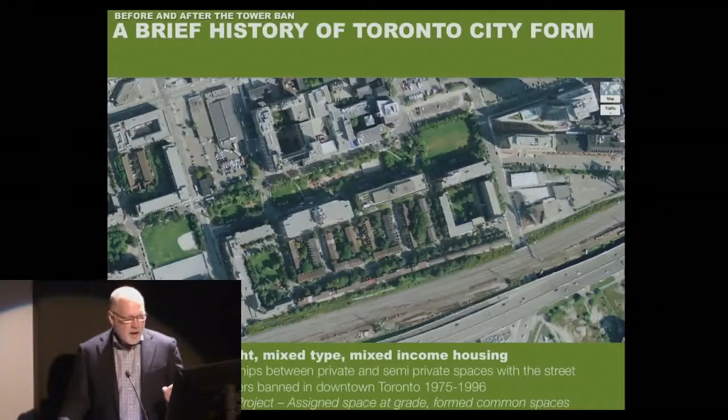A number of buildings were constructed during that time. Some of them are very successful and continue to be successful today.

When the ban was lifted in 1996, it happened by chance to coincide with a significant change in the economy. The economy in 1991 was in severe recession, but by 1996 we were emerging out of it. The ban was lifted by our mayor, Barbara Hall, and the building type being studied at the time, in other places but very specifically in Vancouver, was this tower and podium type that managed urban space, wind, and density.

So our period of growth, this next hyper-growth period from 1996 to where we are today, coincided with the development of this building type. I want you to look at this chart because it shows you some accuracy and some inaccuracy.

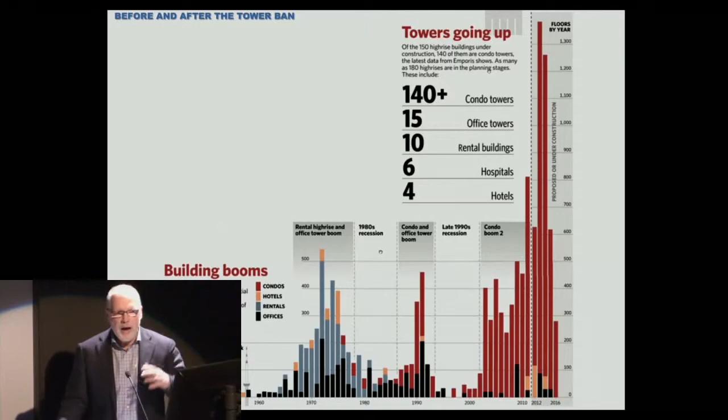So how can growth, with all of the naysayers you read, all of the concern about this building type, how can growth be not slowing? There are lots of explanations in the paper, which I'll leave you to read. But I also want to give you a glimpse of what that means on the ground.

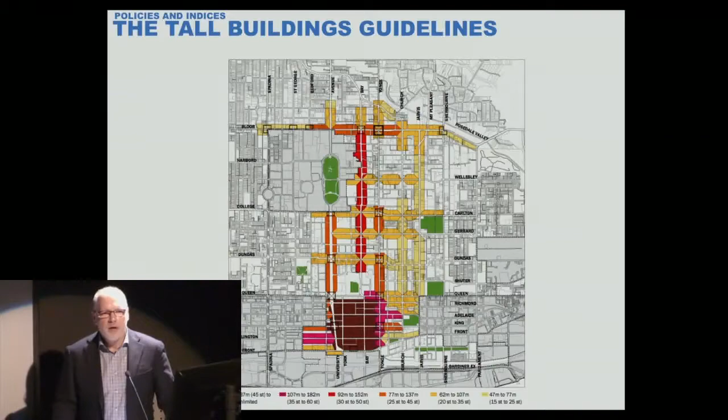So as you can imagine, having policies that might manage this growth, recognizing our history, looking forward to a vibrant new creative city, there are two important documents I'm sure you're aware of. I not too jokingly ask all of the people in my office to have a copy at the office, a copy in their favorite reading space at home, and maybe under their pillow.

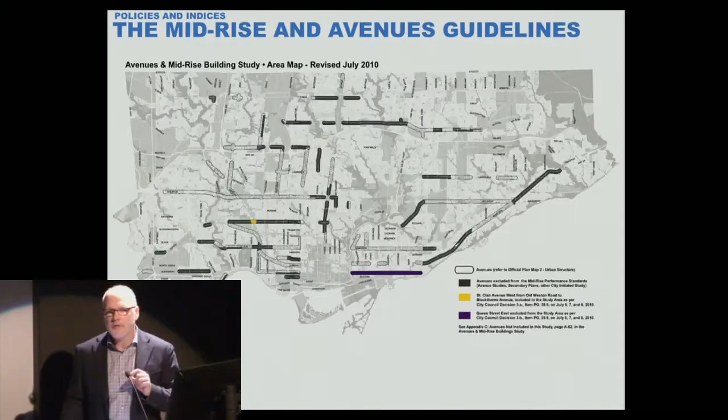What's being suggested is that culture, creativity, and innovation are a powerful economic force. Now, we would have said manufacturing was a powerful economic force, or well, we would have said that for a good long time, wouldn't we? Manufacturing is a powerful economic force, finance is a secondary economic force.

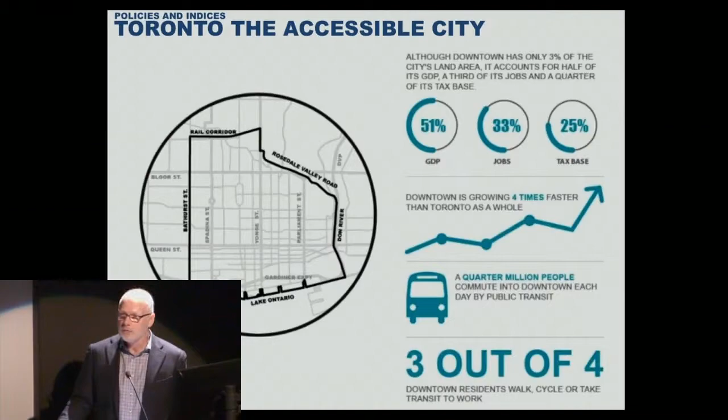So suddenly, it would seem to me that the reason for the unstoppability of hypergrowth in downtown is not based on novelty, it's not based on spectacle, it's actually based on an incredibly powerful foundation of healthy city growth.

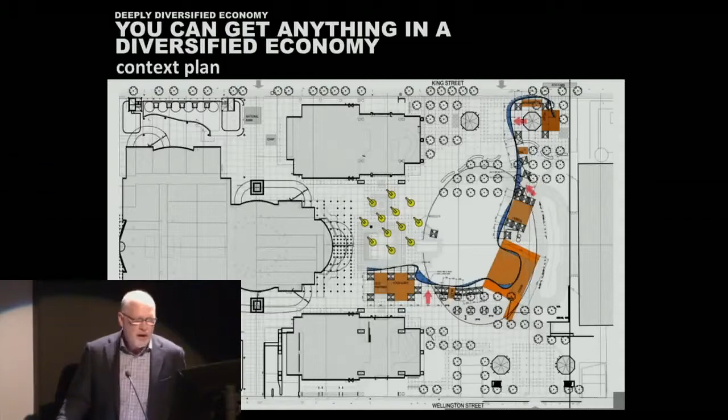1,500 feet of ribbon, of spandex, 20 feet high, the same amount of rental scaffolding, step motors, windsocks — and it was all able to be done through gifts in kind, a little bit of philanthropy, and a little bit of research. Suddenly we were able to reshape an urban space — actually a very bad urban space in downtown Toronto — and give a glimpse of what can happen with a little bit of imagination, in a temporary way, in David Pecaut Square in downtown Toronto.

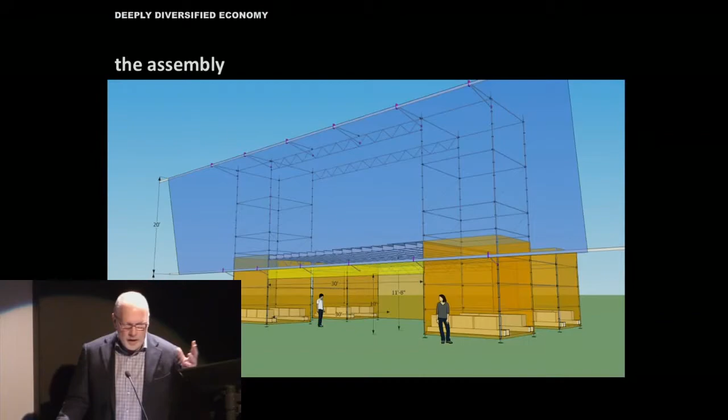Marcin and Bradley from my office led this project. We were able to do some diagrams to put it all together.

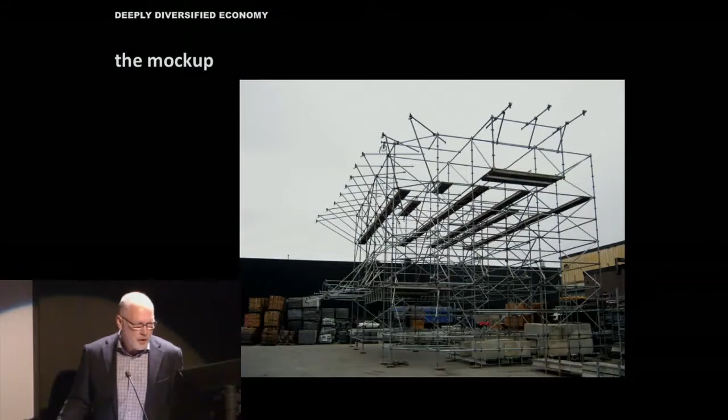We went up to a warehouse site just a little bit north of Toronto, had a mock-up done, and had it tested to failure. We stretched the spandex over these frames, soaked them, and then had a giant fan blown at them. Like, where do you find a fan big enough to tear the wet spandex?

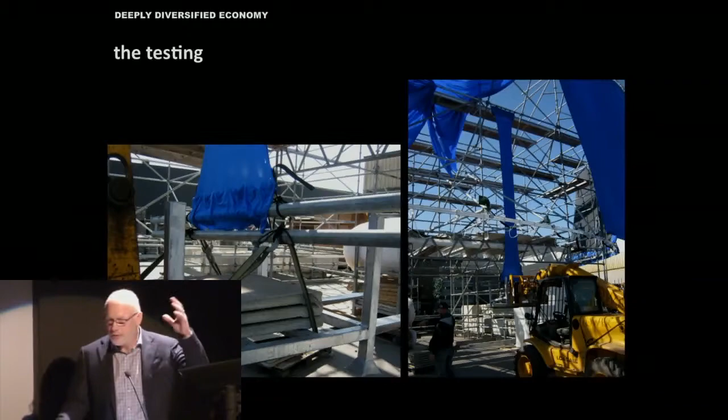We found one. And so then we were able to get someone who was a master tailor, who was able to find a way to do a new stitching detail so that the tension could be applied. With the wet fabric and the better stitching, it was all able to come together.

And if you permit me — I don't know if I can do this, yes I can — I'm going to let you hear it from Bradley and Marcin themselves.

Windscape is Diamond & Schmitt's 2012 proposal for the Luminato Festival Hub. We wanted to make an inviting and interactive space. We decided to use wind as a medium that helped facilitate change in the square.

It's a piece that not only embodies wind as a concept that we tried to use, but also grabs the square and creates a sense of space for the artist, for the public, and for the interaction between the two.

We said basically create the feeling of a space, something that would envelop the city, and have it be artistic — almost be an artwork in its own right. Diamond & Schmitt really were up to the task and created a fantastic proposal.

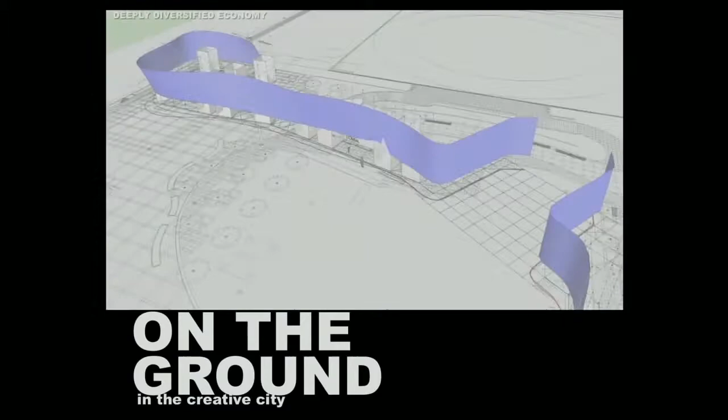There's two main components to Windscape. One is the almost 700-foot by 20-foot spandex blue ribbon. The second component is the 9 robotic windsocks, which are behind me. Windsocks being ambassadors of wind.

These ones here are computer-controlled and choreographed to music. When you get into this world of allowing them to be the dancers, performing in front of you, you forget that they're mechanical in a sense, and you begin to look at them more as performers rather than just a windsock.

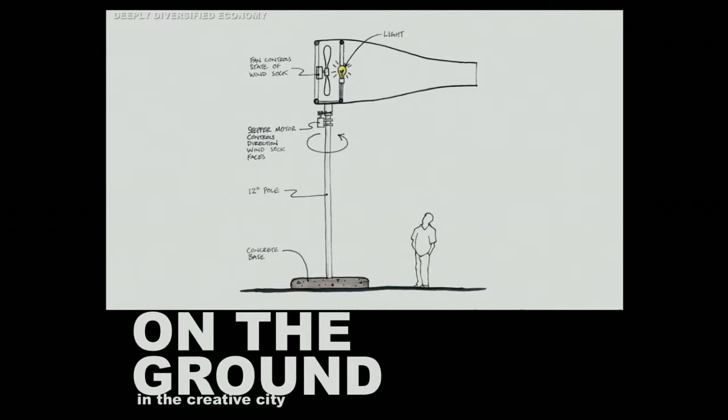After dark is really when the windsocks shine. I think by adding the aspect of light to the windsocks, they really take.

So who you saw, Bradley and Marcin, recent graduates in the office for a couple of years, looking for public art projects, and Janice Price - there's the philanthropy. When the creators and the philanthropy come together, unexpected temporary things can happen that completely transform and allow us to reimagine the public spaces. The diversity of the creative city, the economic diversity, allows this and much more to happen. It's just a taste of what is possible.

I want to talk now a little bit about the premise I enunciated at the beginning, which is about edges and mechanisms. I want to show you a few projects where we made a very explicit point of how we develop the edges of a project and its interaction with the public realm. In some cases it's quite straightforward; in other cases it's literally a device within the buildings themselves.

You're probably familiar with these buildings, but I'm going to ask you to look at them slightly differently now, understanding them not to be a display, but actually to be a mechanism of exchange on the edge of the public realm. This is a very familiar image to many of you.

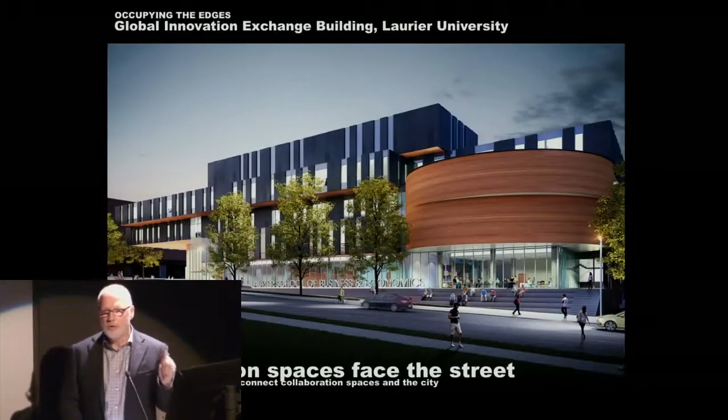Look at the title of this building we're doing at Laurier University: Global Innovation Exchange. It's all about the free flow of creativity among professionals in a building, and this building's sole purpose is that. Forms, okay, interesting, but the edges - ensuring you have the edges to go along with those forms - if not, the building will not make a contribution. It'll be a mute building in the landscape, and the urban space will not evolve.

We're working in St. Catharines right now. This is a project I'm working on, School of Art in the City of St. Catharines. Art gallery, student interaction, collaboration space that doubles as lobby, big porch, covered porch, and entrance. Those are not accidents - those are deliberate layers meant to allow all those lines to be blurred, for it all to become an art gallery, or theatrical space, or student collaboration space. Those edges, even in this environment, which isn't strictly a strongly urban environment, there's that same space right down there - the porch, the collaboration space, and the art gallery behind.

At a slightly larger scale, and in my opinion even more interesting, is this project I worked on at the beginning of the hypergrowth period, the Bahen Centre for Information Technology. The clients came to us and said we have 17 disparate departments - can you bring these departments together? We want to stimulate innovation. We see that our future creativity in electrical engineering is based on the cross-fertilization of ideas.

Not one person having a genius idea, but people talking about it from different departments, where iPhone app designers are talking to Wi-Fi signal designers and encryption designers. It's that kind of collaboration that leads to innovation.

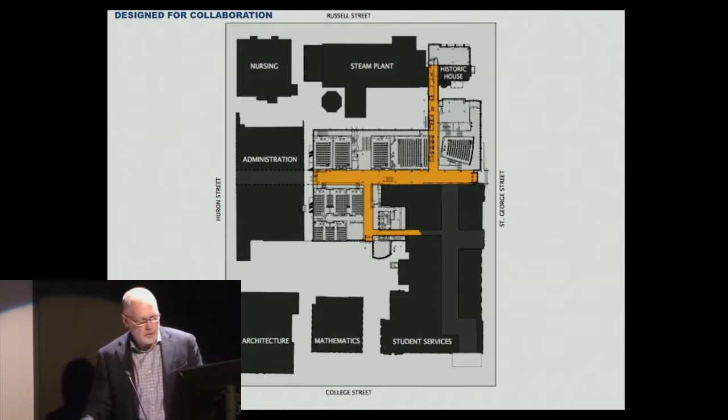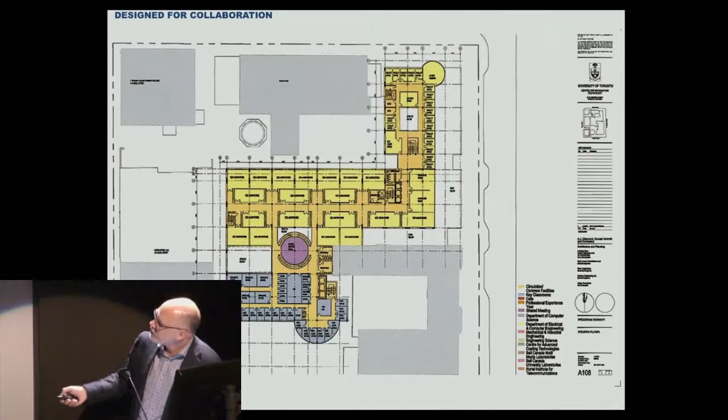So what we did in the center of this block—that's St. George Street in Toronto and College Street at the bottom—in the center you'll see this drum. Those are all the labs. These are the offices, labs and offices of various different scales. But in the middle of the entire plan, we created this very elaborated landing. It's actually a 9-story high landing.

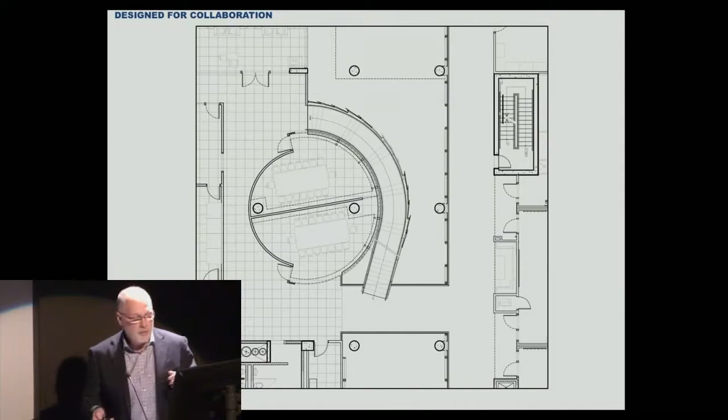6 of the floors have these meeting rooms in it. It's got a stair wrapped around it. The purpose of this was to have people interact informally and formally at the center of the plan—not an abstraction, really, that you had to go there to use the shared meeting rooms. So it was a source of efficiency, but it was also a source of collaboration and interaction.

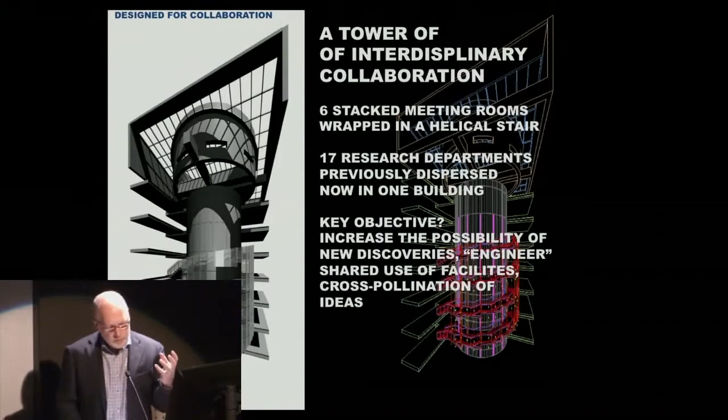This is what it looked like in our diagrams when we were analyzing it. And imagine, again, think of the program that the client gave us: increase the possibility of new discoveries by bringing people together. There are many, many different things that we did in this building, but this is one vertical device that was the focus of all those. And this is what it looks like on the interior.

So it's a stair in light with elaborated landings, with all kinds of opportunities for pause and for collision between two people, but also the meeting rooms themselves. It's a device with the sole purpose of encouraging the cross-pollination of ideas.

I want to talk about this building now in Ottawa that I finished a couple of years ago. We were asked to encourage collaborative learning. It was a fierce project, incredibly short schedule, very difficult circumstances, competition, and we took a chance.

We thought, you know what, we're going to devote 7-8% of the area to collaborative learning spaces. We're going to give all sorts of opportunities, different postures, different kinds of seating areas, and we'll see whether this connects with the client. It really did connect with the client. They loved the project. You can see this 2-story lobby space, but it's an occupied lobby space.

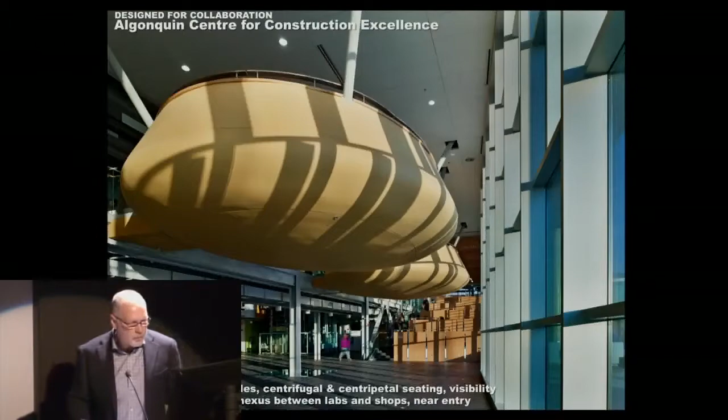These things are seating areas where you can sit in a group, you can sit at a large table, you can sit facing away, you can sit facing in, and we discovered that these different postures, these different configurations, have actually been incredibly successful at encouraging collaborative learning, but also at encouraging attraction and retention. They're now talking about an addition to this building because it's been so successful.

So you can see these devices whose sole purpose is collaborative learning.

One last one that I wanted to show you. Again, the client said to us—it's a very big, very important client, we're doing more work for them in redesigning, remaster planning the actual Sick Children's Hospital—they said, break down silos, encourage the cross-pollination of ideas. Our future success is reliant on it. It doesn't matter that we're bringing 2,000 researchers to this building in a 20-story building together if they cannot work together in new ways.

So this device you see on the exterior of the building is not just a decoration. It is the key piece of the building. Like many other great lab designers in North America, we can deliver a lab building to them, no problem. And we give them great offices, and we can give them efficiency and effectiveness.

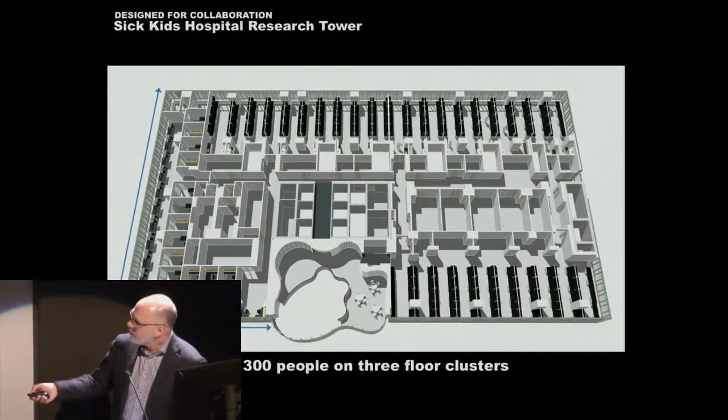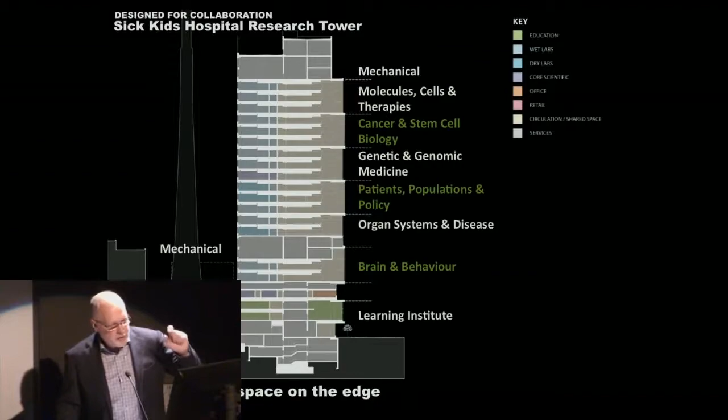But what we also saw was the possibility to give them this space where you can occupy the edge of this as well as the main floor of it, that we can do it in clusters, 3 stories high, so that's 300 people, 100 people a floor, 300 people sharing this commons, and in doing so, start to cross-pollinate between molecular therapy, brain and behavior, organ systems and disease, and look to the future of research in Sick Children.

We also took the liberty of color-coding the exterior of the building in layers to represent these groups.

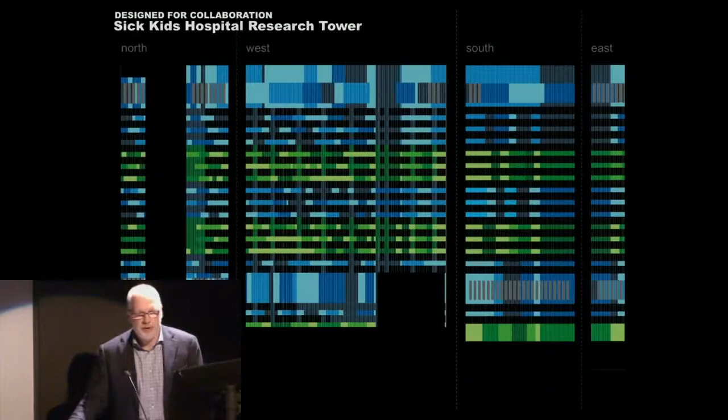But most importantly was that the form of the building was entirely reliant on developing an architectural device with the sole purpose of encouraging cross-pollination of ideas and continuing to build a momentum of creativity in the creative city. Thank you.